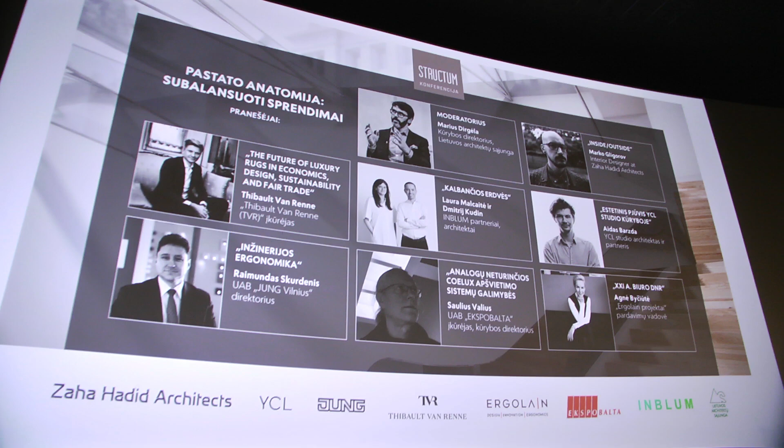Thank you for having me. My name is Marko and I come from London. I work with Zaha Hadid Architects and I was hoping of presenting a little opus of our work today, and I hope you enjoy it. To start off, I was thinking about how to do it and what would be this amazing thing that I would say and then everybody would be amazed. And unfortunately I couldn't come up with anything, but luckily for me, there are much smarter and much better people to say something, so let's use that.

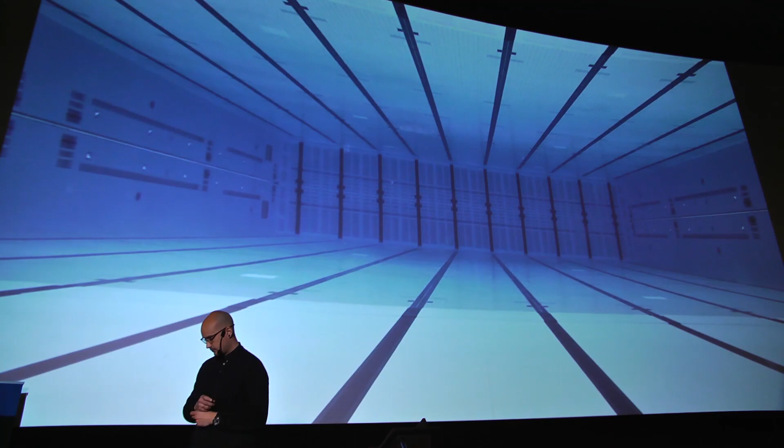We started off as Zaha Hadid Architects 30 years ago, more than 30 years ago. And it was built from that point. We started off with 5 people, maybe went up to 25, till more recently we have 400 people. Well, I mean, obviously I'm the instigator, original instigator of many of the ideas, but with a focus, of course, and it's always on innovation, and it has always been about innovation, about technology, and about materials, but mostly about ideas. And we focused a lot in the last 30 years to develop an idea. I think that all the odds were against me, in the sense that it was very difficult for women to make it in architecture. It was very difficult for that kind of work to make it in architecture. So it's not just being a woman or a foreigner, it was also the work itself was quite, people could not imagine it would ever be happening. So I think that to achieve maybe a fragment of what we would try to achieve was quite a feat, it was quite something. So I'm very proud that we managed to do that.

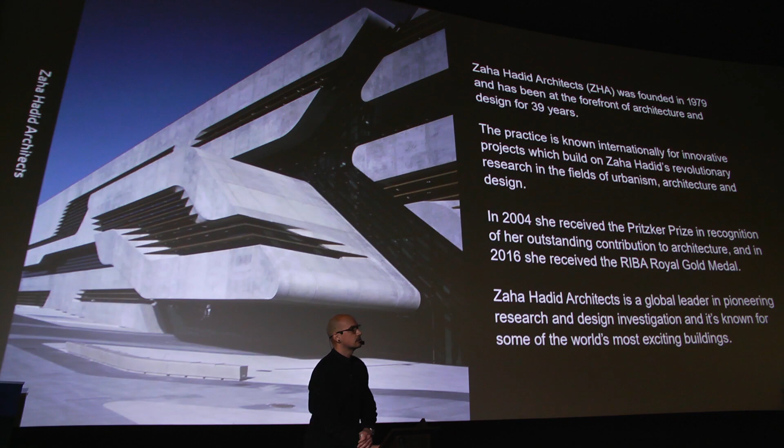Thank you for that. Just like Dame Zaha said, the studio was founded in 1979, so that's almost 40 years ago, this year. And what was briefly shown in the video and what is important to mention is that in 2004, she won the Pritzker Prize Award for her contribution in the architecture, and also the Golden Medal from the RIBA in 2016, being one of the rare women to achieve such an award, I think that is worth mentioning.

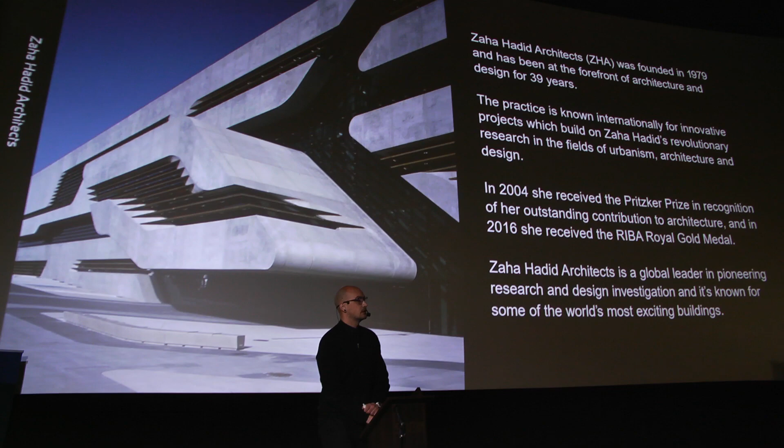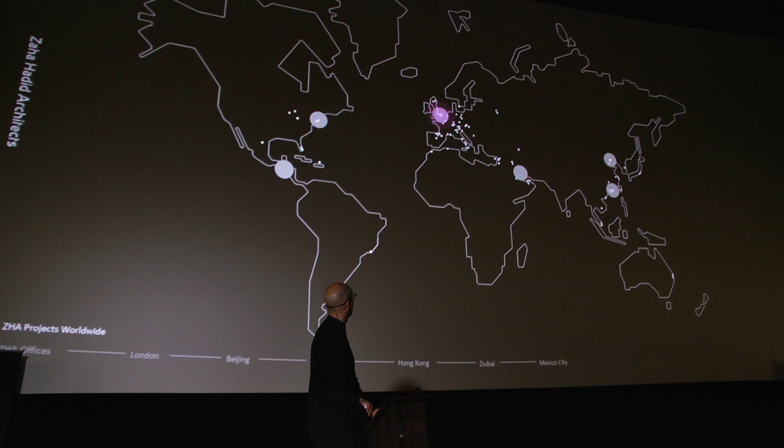Now, our office still continues to exist and thrives, and even though we started as a small office in Clerkenwell, London, we kind of expanded, and over the 40 years, you can see now that we have offices across the globe, with the latest one being in Mexico City as well, with projects spanning the world itself.

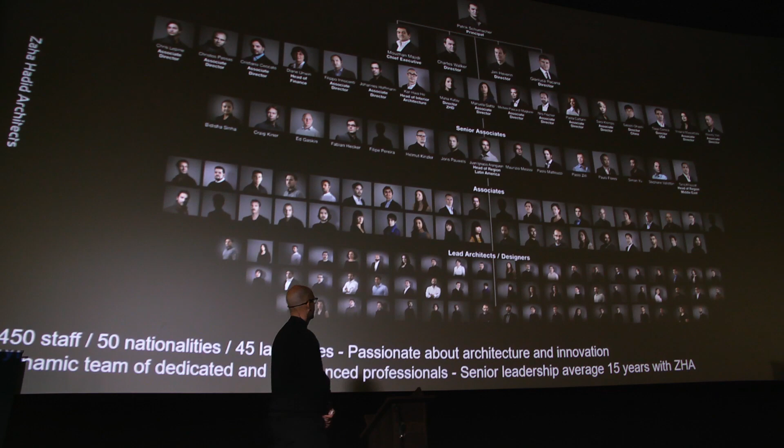But of course now, there's a lot more to it than just that. You can see our kind of structure of our office with our principal Patrick kind of leading the way forward. But of course, a great list of people who used to work with Zaha from the beginning and who learned from her are still continuing to develop that. She mentioned we started from like 5 and then went into the 25, but now we're 440, 450 staff with 50 nationalities, 45 languages spoken between us, and that passion for innovation and research is still there, and it's still going.

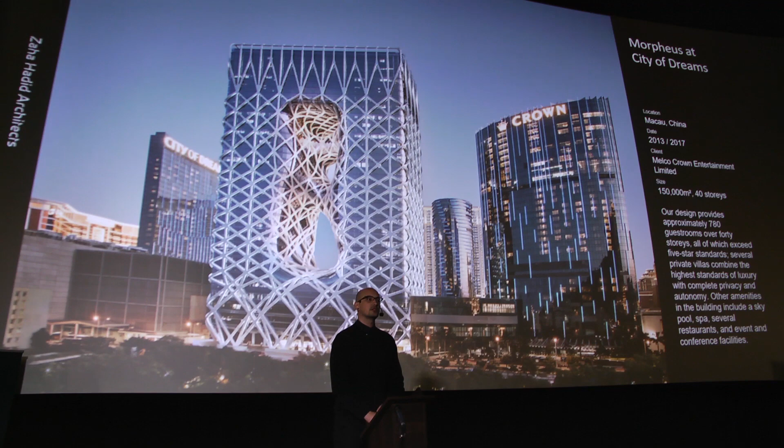In order to showcase and make this presentation a little bit more interesting, instead of just showing the end images of products and what they are, I thought it might be interesting to showcase the process through which we go for each project, and to take a small sample of our work, 2 projects that I worked on, and show you how we go from the concept stage and how we go into the further development of that, through mock-ups and getting to the installed version of it.

The first project is the Morpheus Hotel in Macau, China. The City of Dreams is a huge complex of casinos and very high-end hotels, and we were hoping to contribute to that. It is a 40-story building with a footprint of approximately 100 by 50, with 39 floors, including one level of the basement. I wanted to showcase from the start how the process of creating such an entity begins, and this is the beginning. So we took the parameters of the footprint of the building, the maximum allowed, and then extended it as much as we could, creating this kind of boxy element.

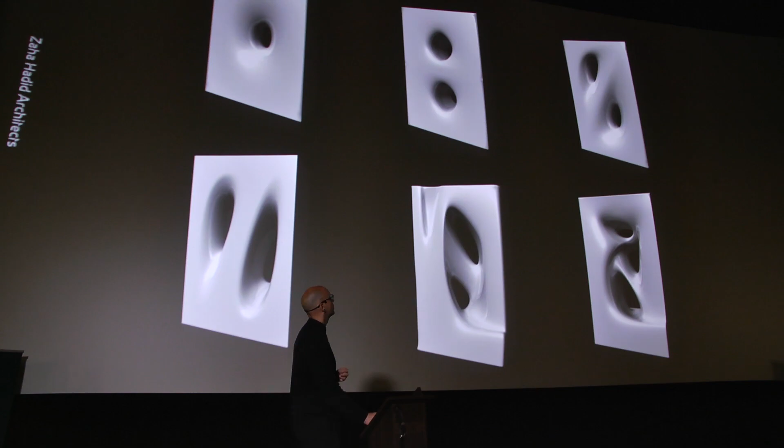Taking that and applying very strong edges to it, we tried to see what would happen and how it would look sculpturally if we started to protrude it, applying one hole and then the other, and how they would look. You can see the evolution going from left to right.

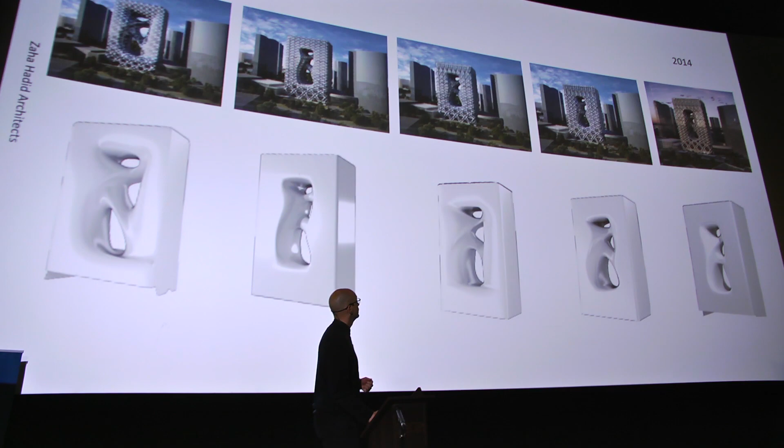What does it mean time-wise? You can see how from 2012 it evolved all the way to 2014, which is what we have now. Over the years we went through the process of finding that perfect form, through research and work trying to find the key element. This is the final product, but just showing that wouldn't be very interesting, so I'll explain further into detail.

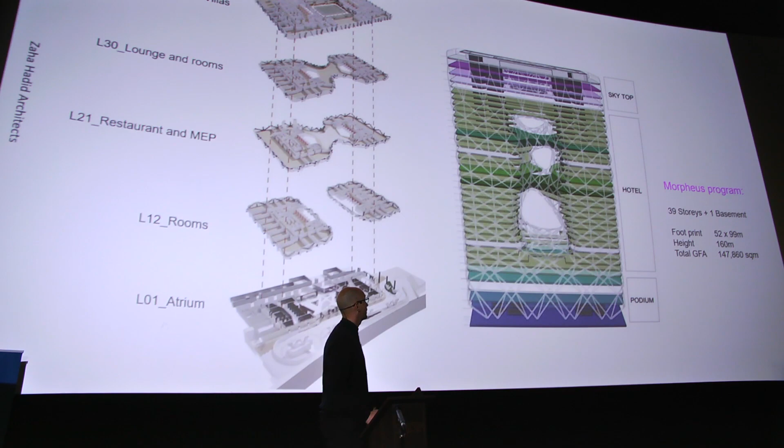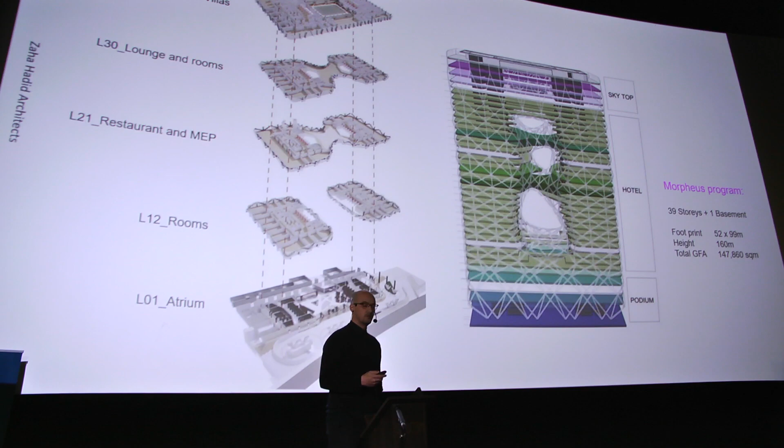In regards to the program, it's a 39-story building with a podium consisting of several levels of, of course, casino, which integrates into the whole City of Dreams aspect. Macau, being one of the meccas for that kind of activity, has approximately 780 rooms, alongside the skytop that has the larger accommodations such as villas, and also the open swimming pool.

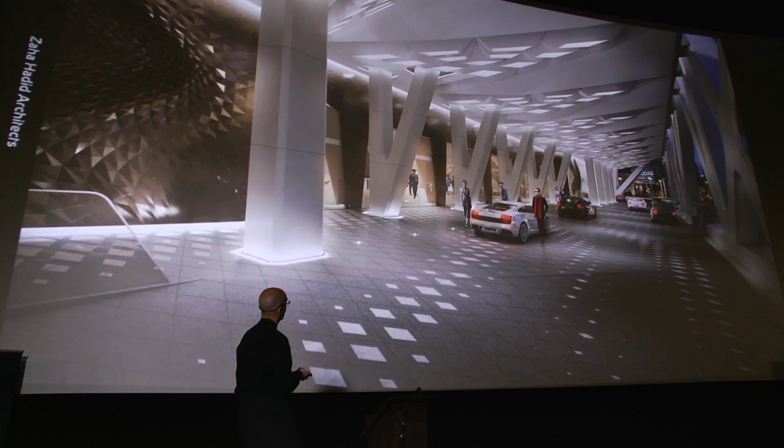But before showing that, I want to guide you through the hotel as a guest. I think it's a rare opportunity for somebody to give you the hotel experience without actually going there. You arrive at the hotel via the porte cochere, hidden behind the exoskeleton, where you're greeted by the staff and taken into the lobby.

This is the lobby of the hotel, where you have entrances on top and bottom, and on the lateral side you have vertical communication in the sense of panoramic lifts. On top we have the huge ceiling where the contents on the left and right are focused inwards.

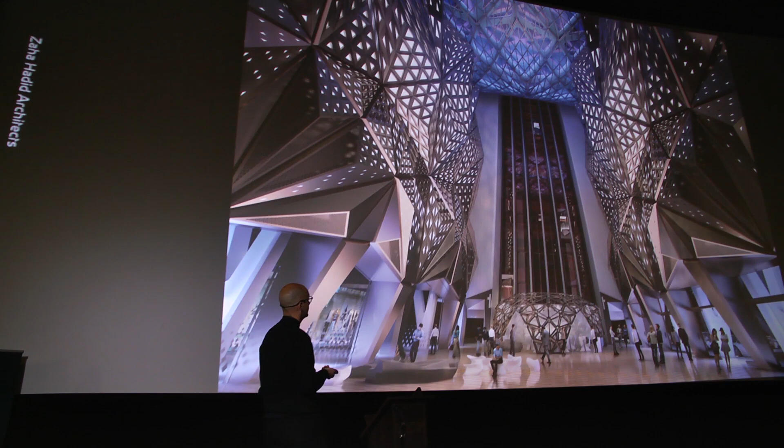As a hotel, you must have a reception area - nothing new about it, but that's on the left and right-hand side. We have a kind of day cafe, something becoming very popular in Asia as well - a day restaurant that has only sweets or dessert throughout all the courses of the day. This is our try, and behind you see the panoramic lifts working together, which were completely custom designed for the project.

Now, how we went through the process of designing it. When you approach the problem of designing a space with such a high ceiling, you start to lose the tangibility of human scale. If you populate it with chairs, you will never achieve that sense of accessibility to human scale. So what we did is figure out a way to assemble a structure taking in existing motifs of the building and applying them to create this structure, which gives us an area for that cafe to exist.

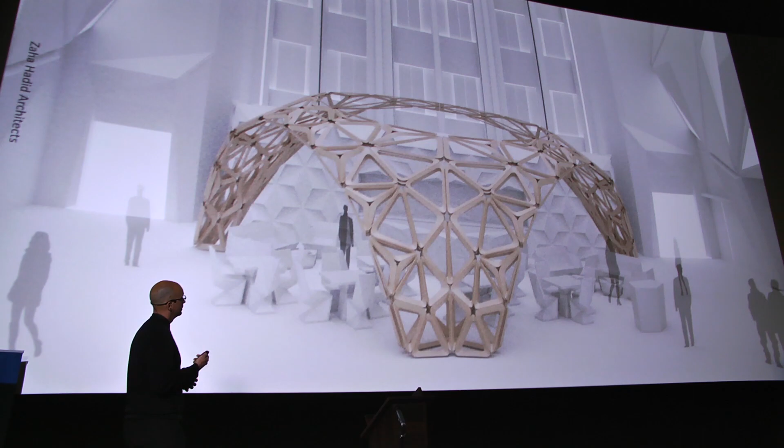A very simple, not that simple, but appearing very simple structure, being also very transparent and light as well.

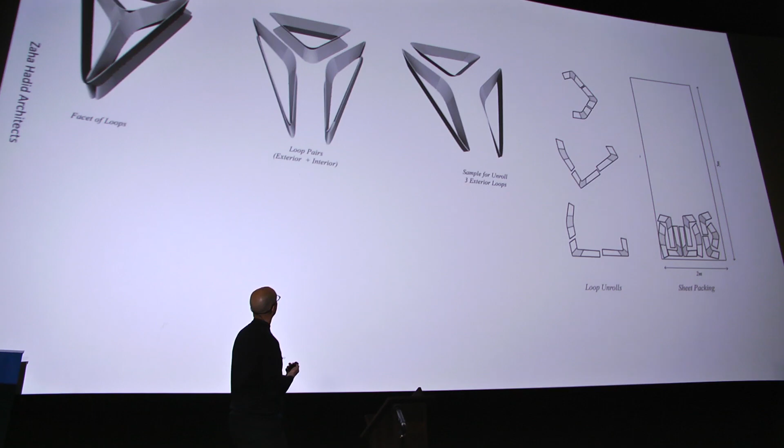The way that was designed is it consists of a double layer of flat aluminum pieces, which can be CNC cut from a flat aluminum sheet and then assembled in a sheet packaging and brought to the site and assembled as well. They consist of two layers: the outer layer and the inner layer of the structure itself.

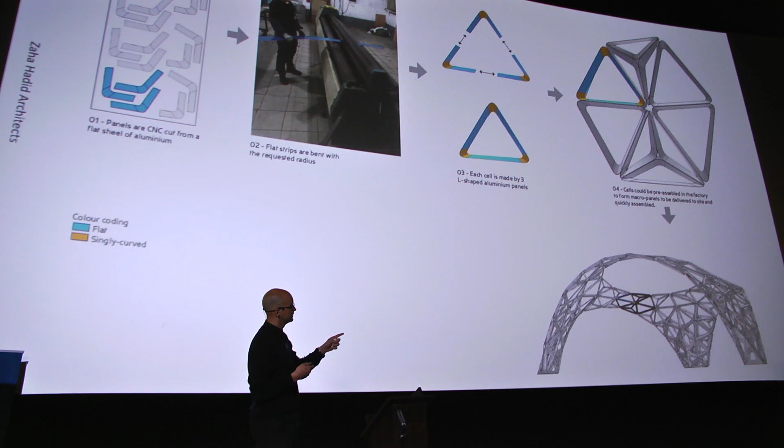In terms of manufacturing, the panels are cut in CNC, and then the flat strips are bent in the corners to achieve the desired radius depending on the location. So then you get the 3 L profiles that you assemble, getting that cell you can see in the third image. That cell, assembled with the other ones, becomes that kind of macro panel, and part of that macro panel becomes this part of the structure.

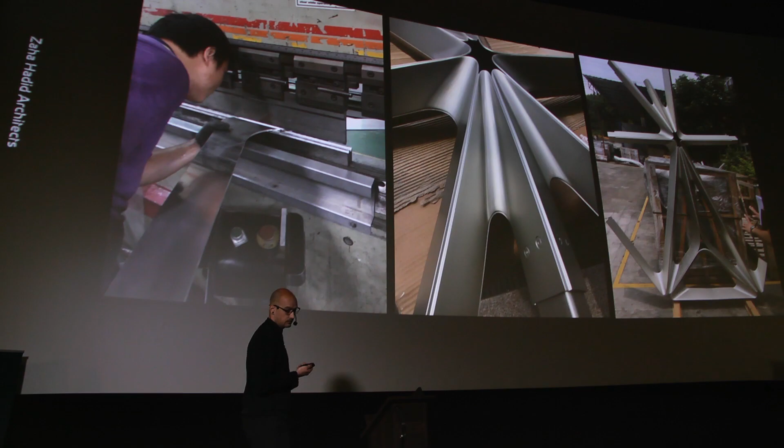And then how it looks during the first testing that we did. You can see the manufacturing or the bending happening on the left, and then the finish assembled in the middle image. You can see the amount of precision that the manufacturing was done, which is just incredible. And then how it looks assembled on the right, in one of the visits done to the Chinese manufacturers.

Other than that, I wanted to show you a very short video of an already done space, and this is the ride in the elevator, in the panoramic elevator. Just how the space looks and what it does. You can see the structure. It's not really covering anything, but it's usually just giving that notion of existence and belonging almost.

And then as you continue up with the elevator, you're going past the first belly, as we call it, and the interior part of it, and then getting to the top levels where I'll show you the restaurant on the 21st level as well, and then getting to the top level where the villas or the larger accommodations and the swimming pool are.

This is a kind of unique view, I think, for the hotel, considering that it has that notion of going inside, but also outside, so you don't really know where you are. I think that's a great, very unique experience that you get.

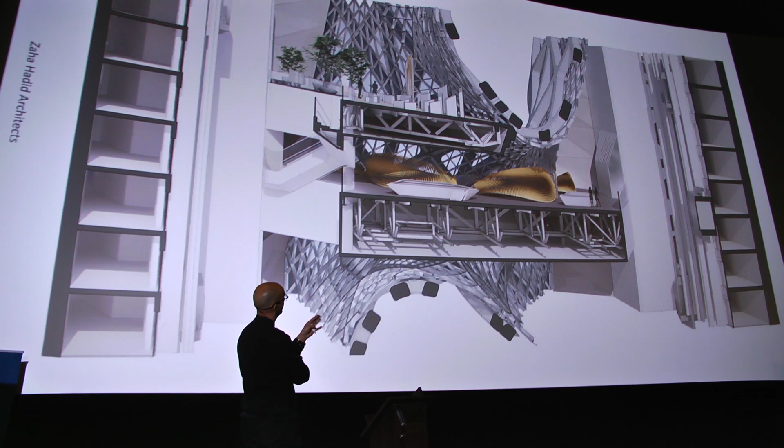I mentioned the hotel and the other levels as well. This is the restaurant at the 21st level, and here in this diagrammatic sketch, you can see how it exists between the structure, the exoskeleton, and the content of the restaurant as well.

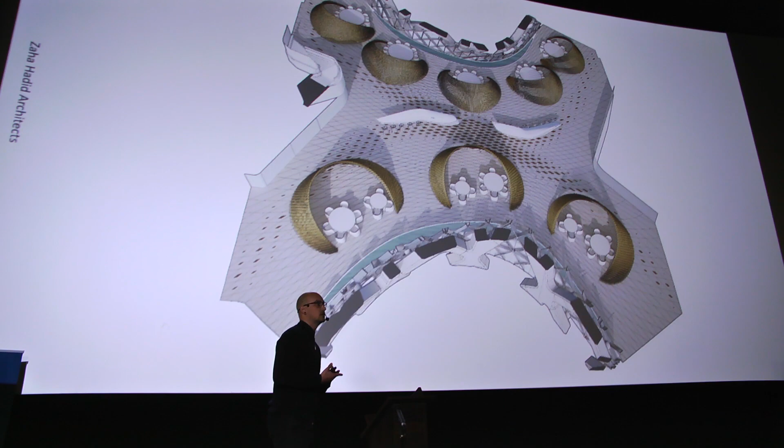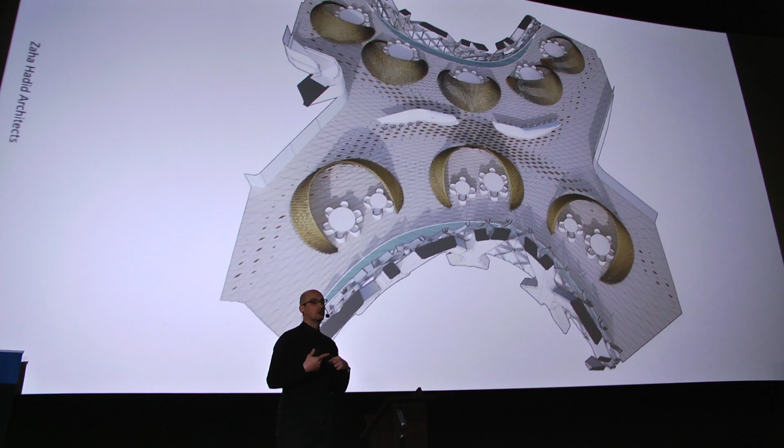So the way we thought about it is that we had this open space on the 21st level where we needed a restaurant. So in order not to just populate it with tables, we inputted a couple of parameters. We juxtaposed the privacy that the restaurant requires, or the diners require from being in a higher end restaurant, but also the higher traffic or expected traffic of the rest of the guests walking around trying to see it.

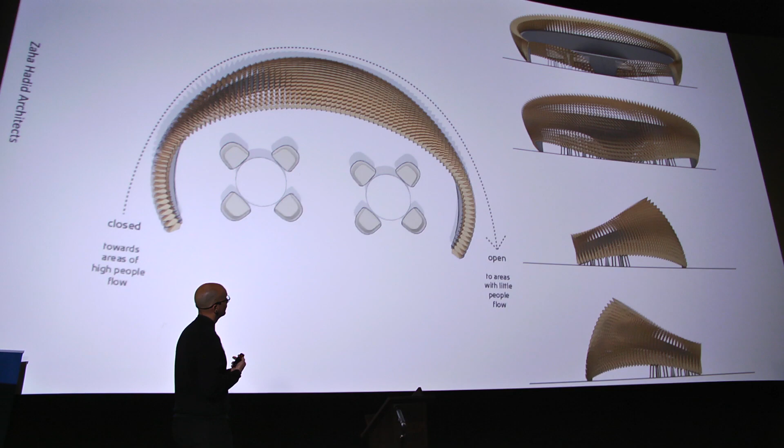So what we came up with was a parametric approach to the whole story, where the expected traffic of guests was higher, the individual elements would close, and the cocoon would stop visibility through it. Where we were expecting a smaller amount of passengers or guests, the cocoon would open up, and the guests, the diners, would actually see through it, having this lighter sense of the whole space. And then on the right you can see how it looks in the different elevations and side views as well.

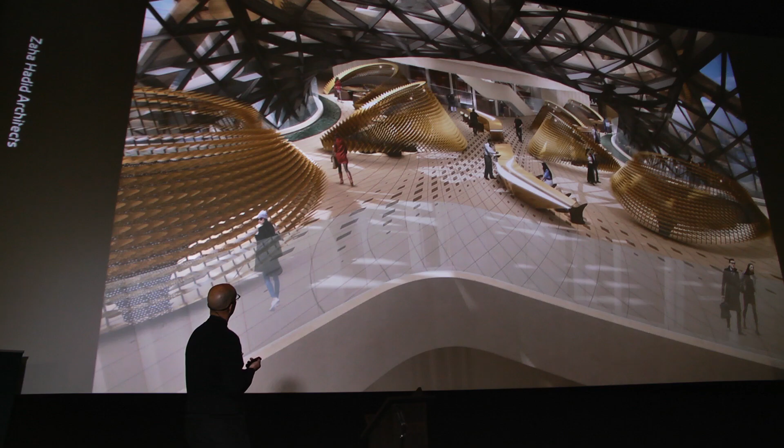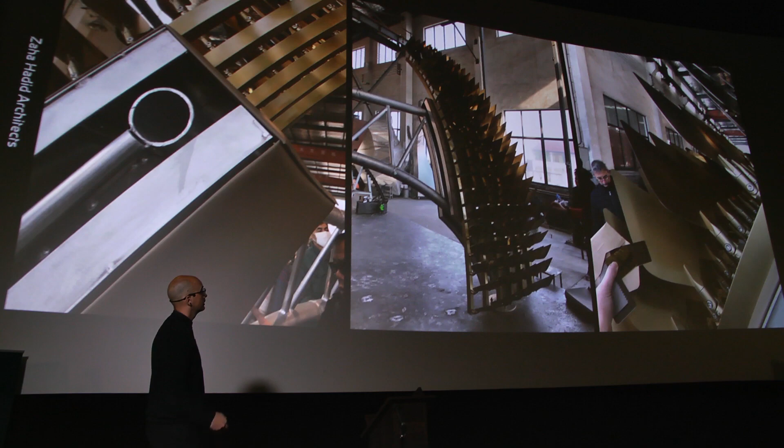And then, of course, testing whether the finish is correct, as desired. This is how it looks built, very similar to the render. We were quite happy with the effect of it.

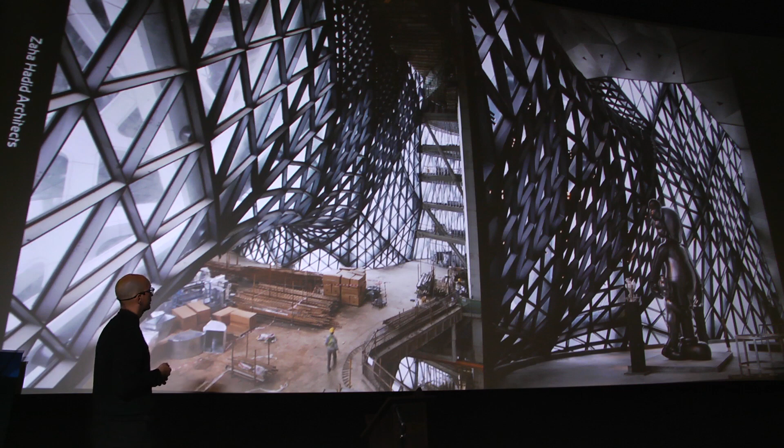To end the presentation of the project, I wanted to show images during the construction, and this particular one shows the before and after of the same space. This is during the construction phase, where we can see it's still not done, and then the actual finished space, being used as well.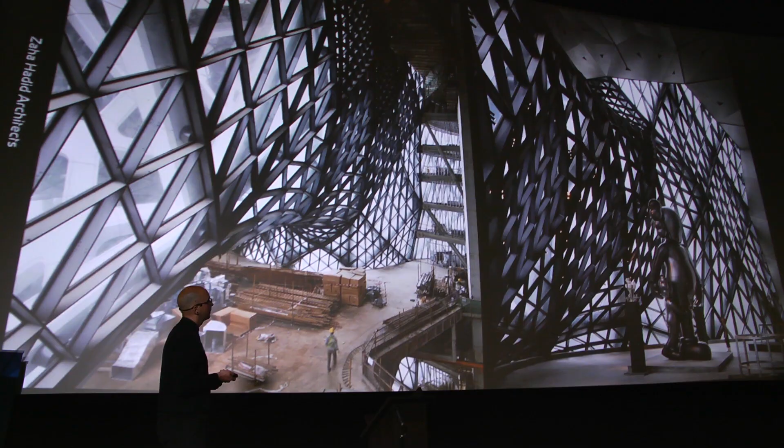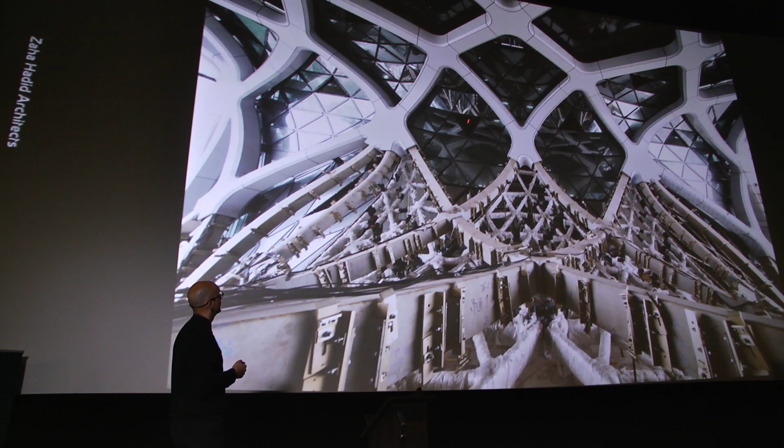The facade being developed — I think this is a beautiful image depicting the installed part of the facade being almost in half, with this one still in the process.

Now, don't get me wrong — there's a whole presentation of at least two hours just on the facade. What I was trying to do is cover the whole thing very briefly for the time that we have.

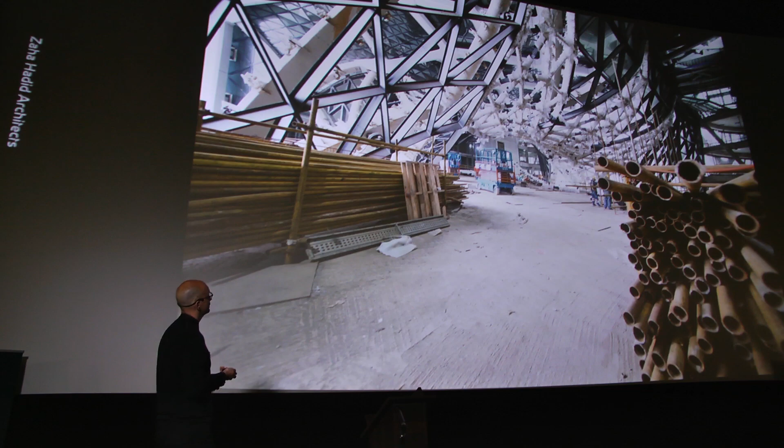You see the interiors as well, and while it was still being done, the structure on its own was already existing and just being incredible, and I hope you agree.

So that was Morpheus, and the second project is something that is still being built. Another project very dear to me is a bit different, and I think it's important to showcase rather than another hospitality project. What it shows is an infrastructure project — this is a metro station in Riyadh, Saudi Arabia.

Saudi Arabia has for almost a decade now been building one of the largest building sites in the world, creating a public transport system from basically zero, with six metro lines being built at the same time. We were lucky to have one of the key stations designed by us — we won that in 2012 in a competition, and were lucky to see it through, further develop and design it, and also participate in the construction phase of the project.

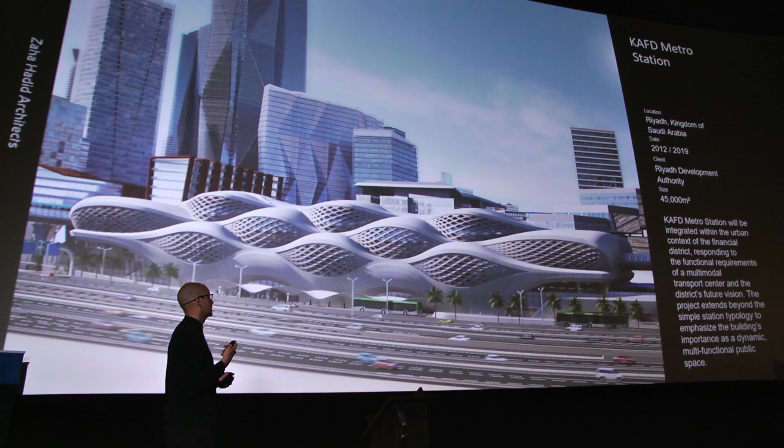The location of the station is in the King Abdullah Financial District in Riyadh, a new financial district whose master plan was designed by Henning Larsen Architects, along with many star architects like Norman Foster or OMA, etc., who have buildings inside. It's an incredible space that, once done, is going to be a masterpiece, and we were lucky to participate in that as well.

Now, regarding the inspiration for this particular project — usually a designer, not just us, seeks inspiration in multiple ways and places. Sometimes you have to go far and really struggle, and sometimes it's not that obvious. But in some ways, if you look at the surroundings and at what you're doing and where it is, you just might be lucky, and I think we were in this case.

Lucky in the sense that you need to recognize qualities that might not be obvious. One might consider a desert a harsh place, where even during the day you're too hot, or during the night you're too cold — not an environment for somebody to really thrive in. But recognizing beauty in such a harsh environment is key.

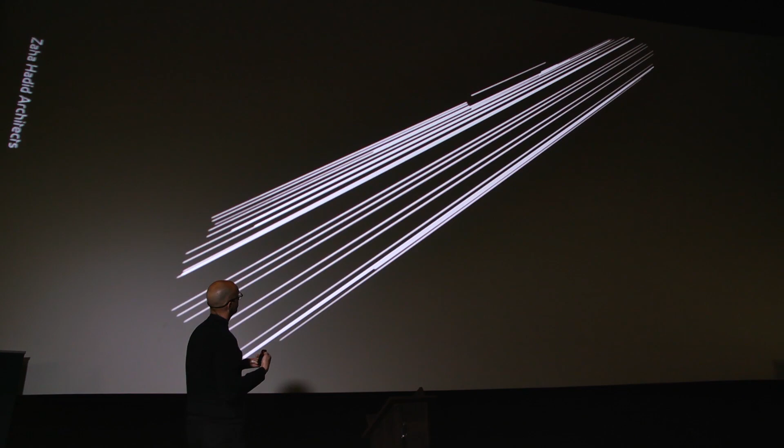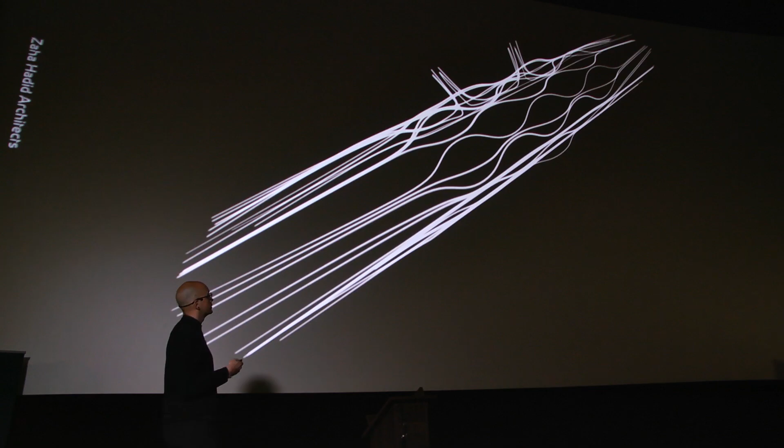But what would that mean in the sense of geometry? We can talk about form, but we have to create something more tangible. As I mentioned, there are 6 lines, and out of those, 3 metro lines are in our building. If you apply those train tracks as an abstract line, then add on top the building requirements and volumetrics, maximizing the size and the site you have, and apply additional parameters in the sense of visitors, human scale, and opening up towards daylight, what you get is a form that logically works in your favor.

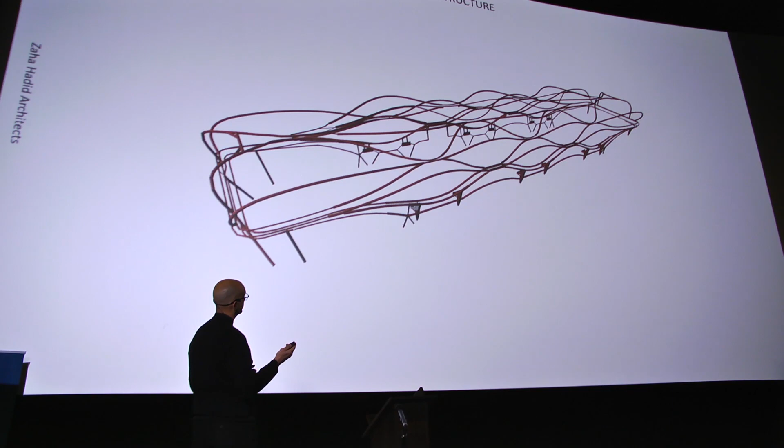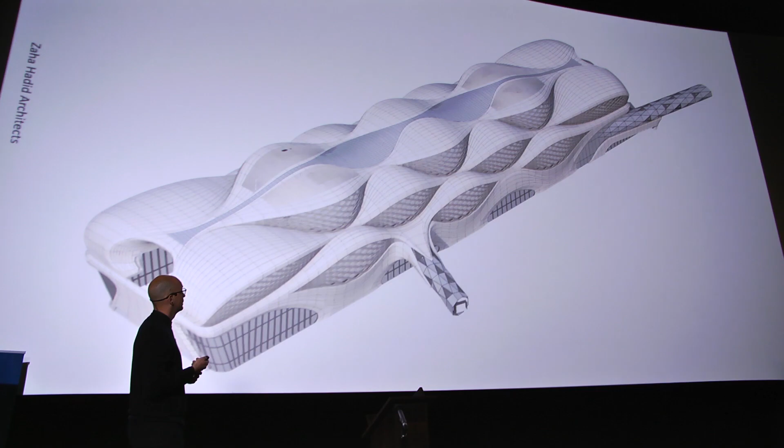Now what does it mean in the structural sense? I hope you can recognize the lines I was showcasing. Those lines turn into a structure - in red is the longitudinal structure, the main structure of the envelope of the facade. Once applied with additional cross structural elements of steel, and the diagonal grid of the 'eyes' as we call them, at the base, you get the full structure of the facade. Once you weather-seal it with the facade elements, you get this form, and once explained, it's rather obvious.

Now, what does it mean to work on a project such as this metro station? As I mentioned, it is still one of the largest construction sites in the world, and that means the amount of people involved is incredible. Trying to find a way to manage all that work in terms of time, but also in terms of collaboration, is a major challenge.

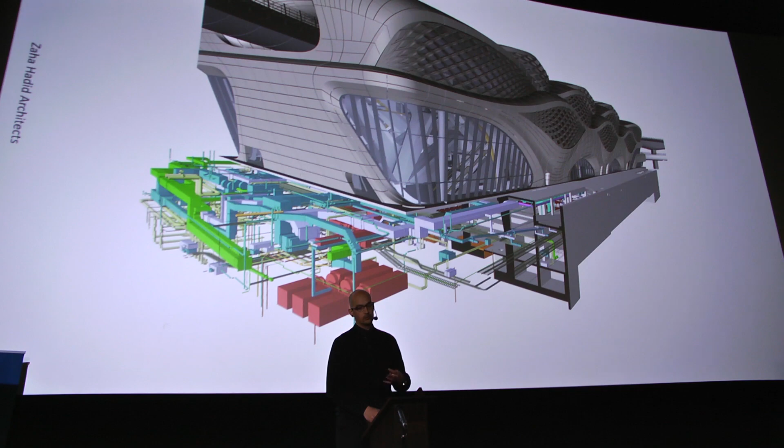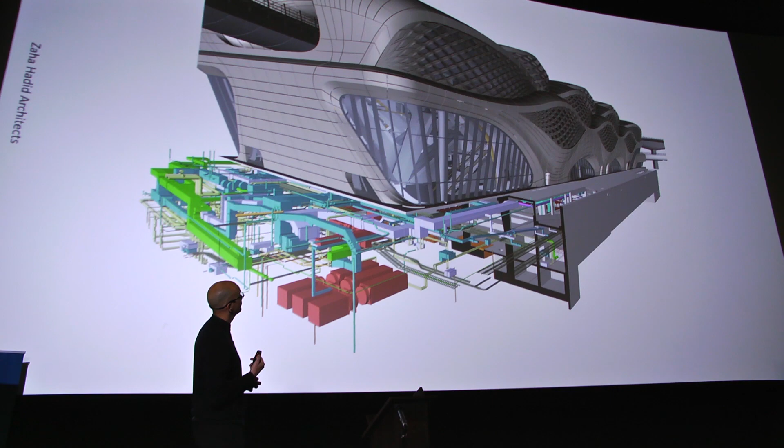We were contracted to work in BIM, or Building Information Modeling technology. In this particular case, it was Revit. You can see here this image taken from Revit, where the facade of the building works, and you can see the red structure I was showing before, but also all the mechanical and other equipment required, along with the cables and cable trays.

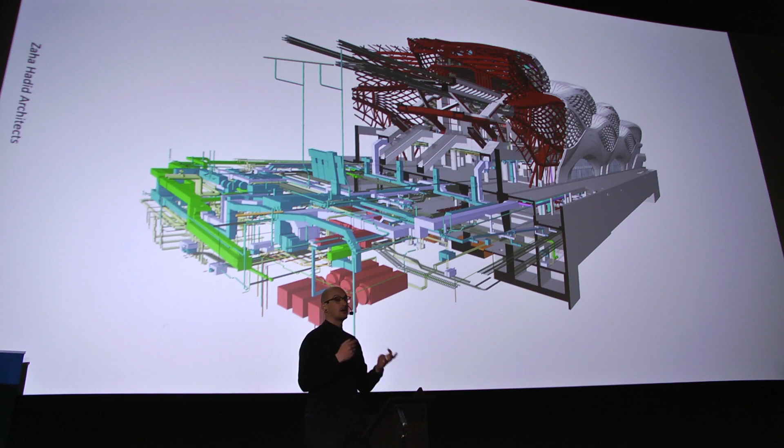The level of information that goes into such a project is incredible, and trying to manage all of that so it doesn't clash is difficult, because there are engineers working on our station based in Bangkok, we are based in London, and another set of engineers in Germany. Us all working together is impossible without software like that.

I want to showcase a couple more images from the Revit model itself, showing how well coordinated it was, and the incredible amount of work that went into it, not just by us but by all the consultants as well, and where we're hoping to build this. This is a longitudinal section, and here's the cross section.

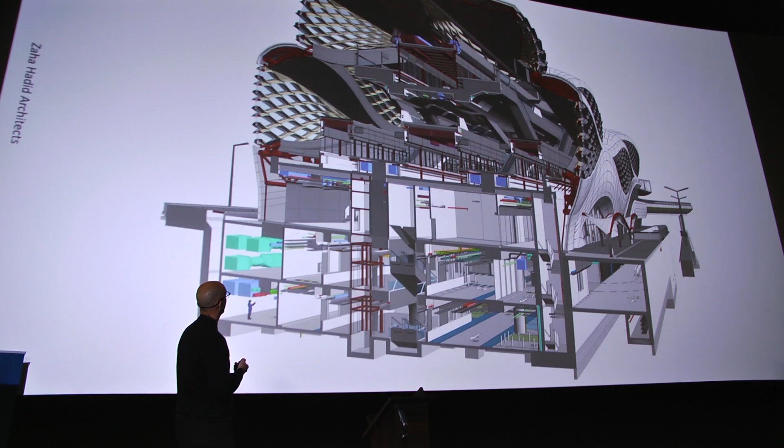Showcasing, as I said before, all the piping and ducts, and how that works together. With methods of clash detection and other technologies, which I'm sure you know of, we were managing to find a way to design and create a building that can be built easily and efficiently.

I told a story about the facade, and briefly mentioned the eyes as well, so I'm going to go a little bit into that before switching to the interior part. I'm doing well on time.

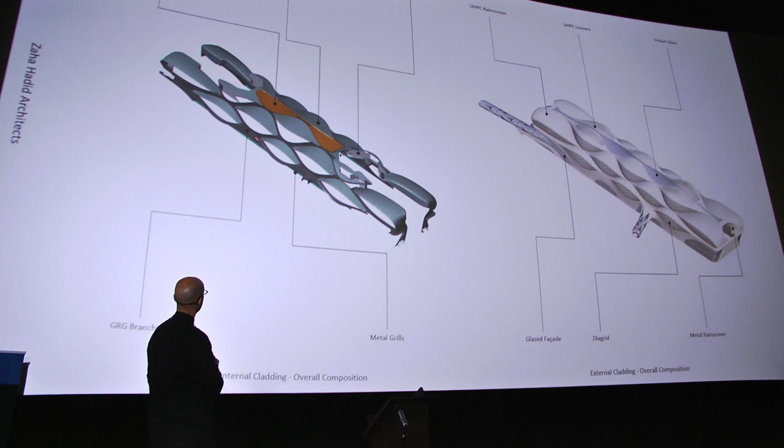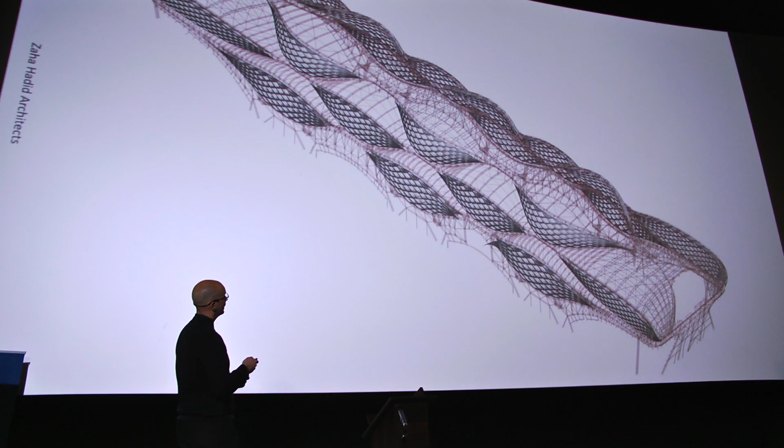I want to talk about how we tried to think about controlling such a harsh environment of sun and incredible heat, but also incredible cold, in the most natural way - or not the most natural way, but the most efficient way, you might say. This image shows all the structures I've shown before, with the diagrid, as we call it, or the diagonal grid of the windows.

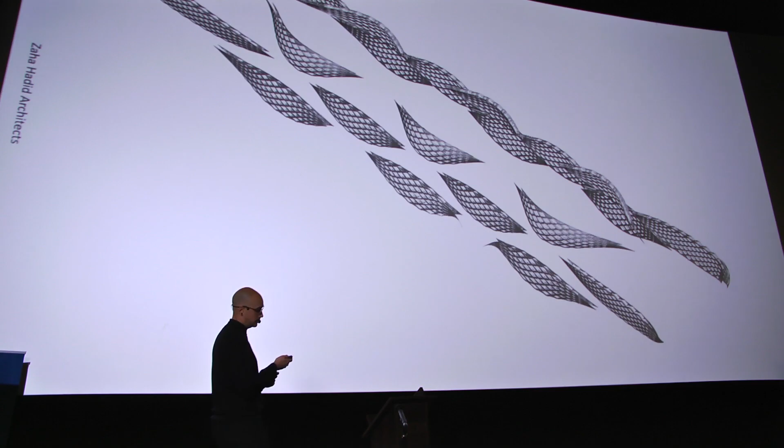So this is it. These are approximately 20 or 21 bays that we have, populated as you can see here with the exterior part of the diagrid and the interior part. What does that mean? I'll show you now. This was inspired by...

The result is basically that: we have the outer element created in ultra high performance concrete, where we have the glass piece, and then of course the composite panel in between them, and on the interior part we have the glass reinforced gypsum, which together work as a barrier between the sun on the outside and the calm interiors we're trying to achieve on the inside.

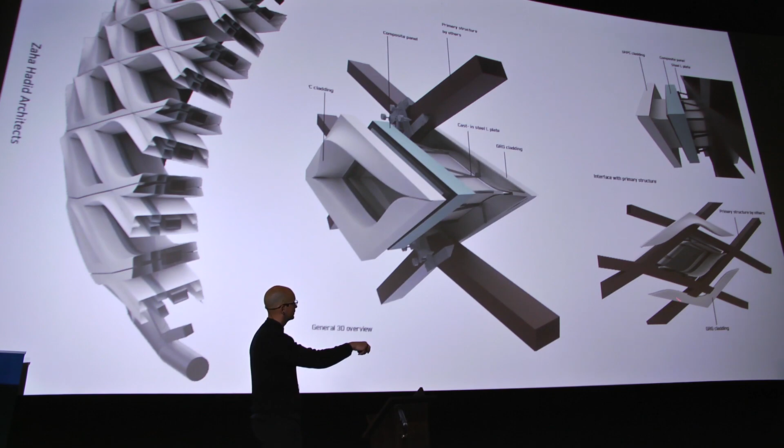Now, due to the complexity of the shape itself, the hand manufacturing, and especially the material chosen and the sheer size of each individual element, a machine approach to the manufacturing was required. This photo was taken during one of the visits to the manufacturer, where they were using an 8-axis hand to mill the actual mold used to create the individual diagrid elements.

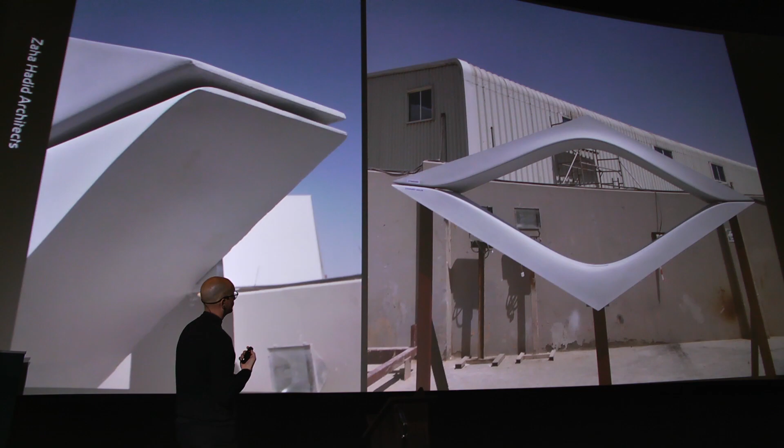You can see it here. This was one of the first tests done to check the possibilities of the size, but also the finish of it and the application of the sealer, or whether it's required or not, how it looks, but also the precision you get while using manufacturing at such a high level and standard.

And of course, later on, once we went through a couple of iterations, this was one of the official mock-ups done for the diagrid, but also for the full concrete elements of the facade as well. This is just a small portion - if you remember, the whole building consists of hundreds and hundreds of these.

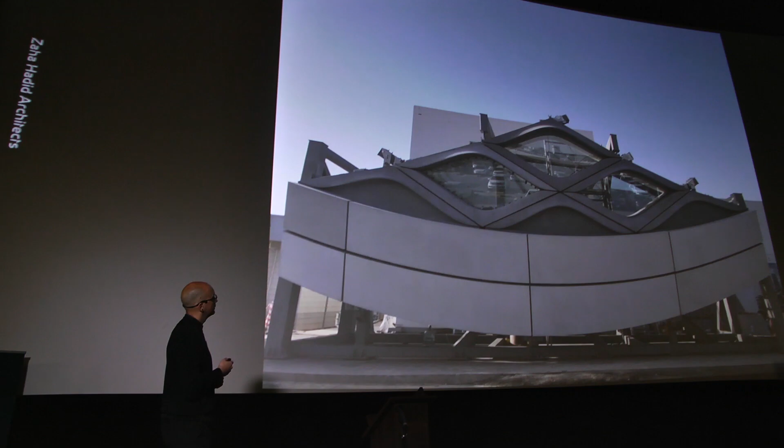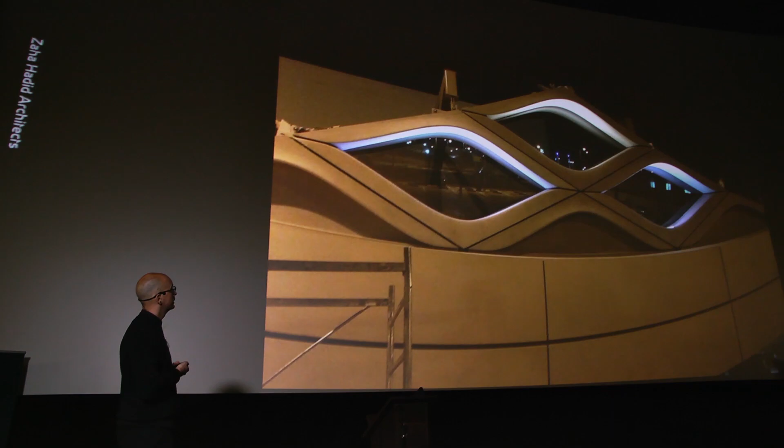You can see here how we tried to test the approximate coloring and color matching of the facade element, and the bottom ones being how they should look and whether they should be closed or not, etc. Of course, testing of the uplight and how individual elements should be lit, and what the color temperature of it is. How does the design, how does the detail work?

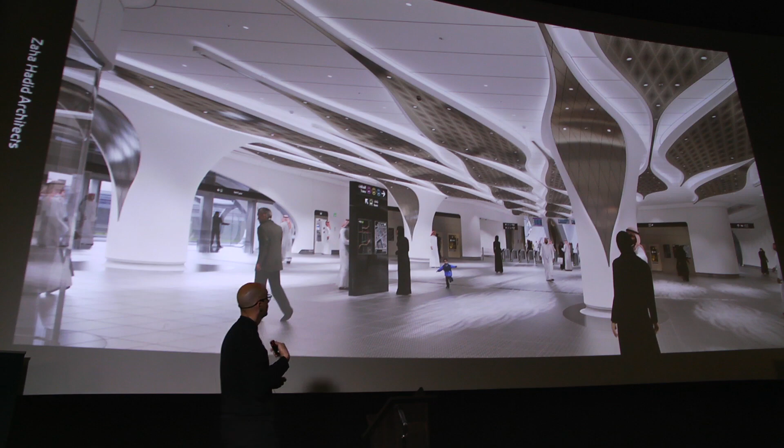Once you go inside, I thought about whether I should just go through the images of the renders and photos, but I thought it might be interesting to showcase: hey, this is the design, and then what might be done. So this is the main kind of entrance atrium where you're able to come in, actually buy a ticket, and then go through with your ticket onwards with your journey.

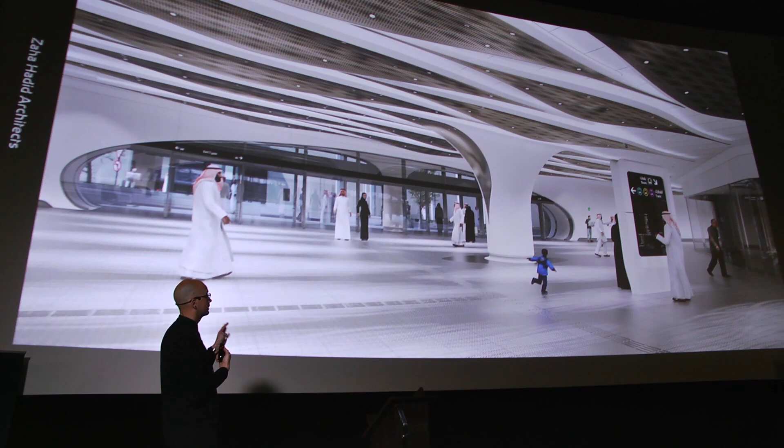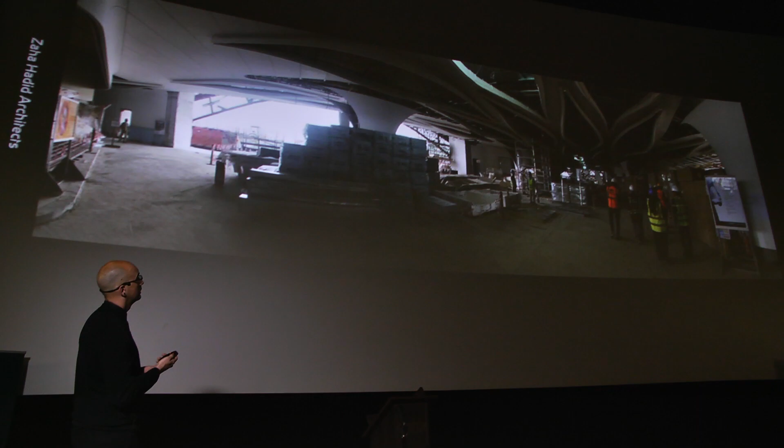Depending on what your destination is. And this is another image of that same space, looking more through the main atrium outside. And then this is the panorama that our site team did, showcasing how the GRG panels are getting installed and how that will look.

I'll move on further with the design elements. For anybody who has ever visited any Middle East public buildings, such as airports or other infrastructural places - and I think these are now getting installed not only in the Middle East or GCC area -

the prayer room is almost a must. What we did in the design was use the directionality towards Mecca, which is required by the design itself, getting this triangulated shape that we broke off to achieve a cocoon-like calm space that people can get away into and do what they came in to do.

As you purchase a ticket and go through the gates, this is one of the main communication points towards the trains and the upper level where the trains are. I wanted to showcase it as it's one of the rooms with the highest ceiling in the station, but also, in my very humble opinion, the prettiest of them all.

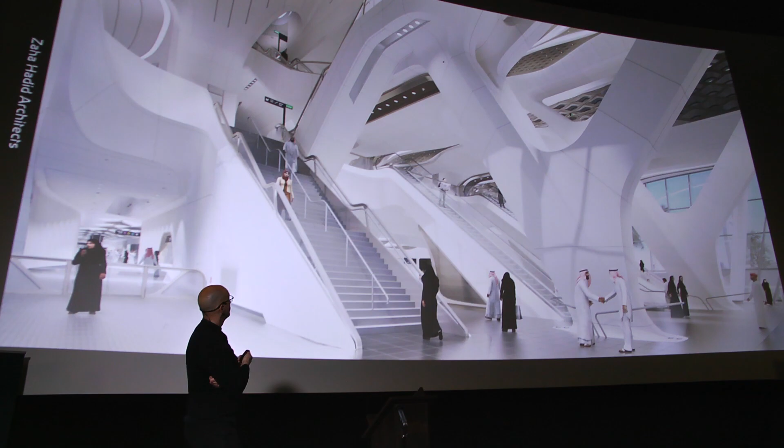It showcases the high quality of the engineering that went into taking care of the loads from the higher levels, and with the raking columns bringing them down, how we approached addressing such an imposing structure and dressing it into GFRG panels. This is one of the submission drawings we did for this particular location.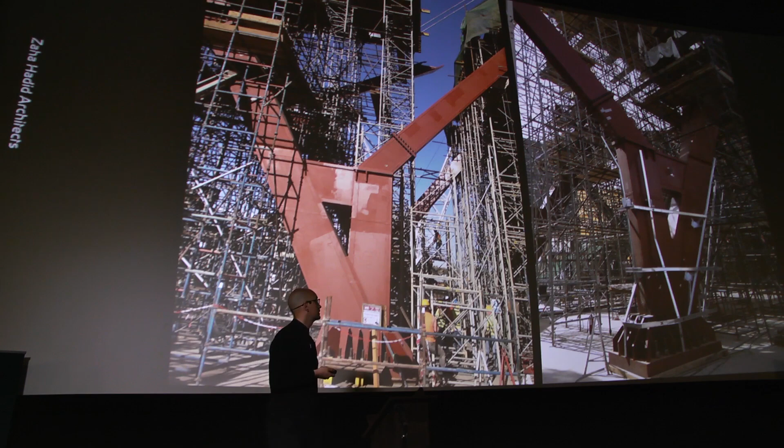Later on, this is a bit more assembled column, and on the right hand side, what is important is that this is further developed and assembled on site. You can see the secondary structure being assembled as well, where the GFRG panels will later come on. And this is it - the installed column with the GFRG panel.

Again, you can see how big and tall the space is, and how it's starting to take shape and resemble what I've shown you in the render as well.

I wanted to showcase the journey a bit further along. This is the so-called unpaid area, as we call it, the area on the higher levels where you're still not going through the gates into the trains. This is a high level that is very close to the facade as well.

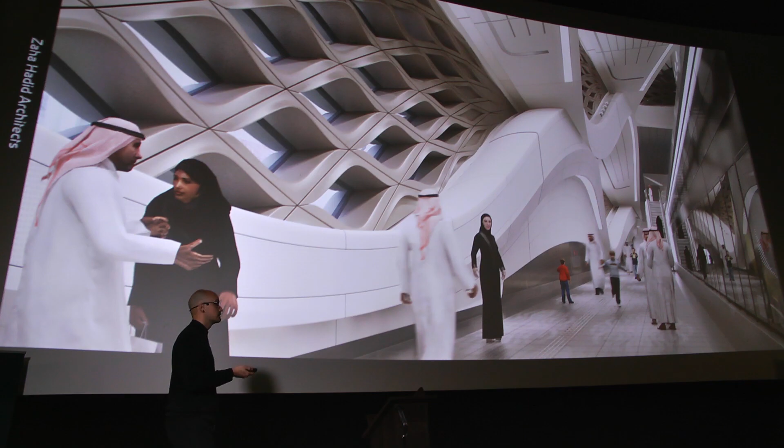And then this is the so-called pay area. This is the moment where you're actually waiting for your train - this is the platform for lines 4 and 6.

What we're very proud of is that the level of development of the project was very high, considering it was an infrastructure project, and the requirements for such a project are incredible - the amount of equipment, from CCTV cameras to lighting to everything else, is enormous, and coordinating all that was something we're very proud of. I can freely say there isn't a particular element we don't know where it was, what it is, how it went, and what the detail about it is.

You can see here the platform level, from left to right. In between, what we thought about is - because we don't have any walls or ceilings at all - how to integrate the AC as well. So what we did is try to use the floor. This metal element becomes, besides being the bench and the accessible part of it, also serving as a plenum.

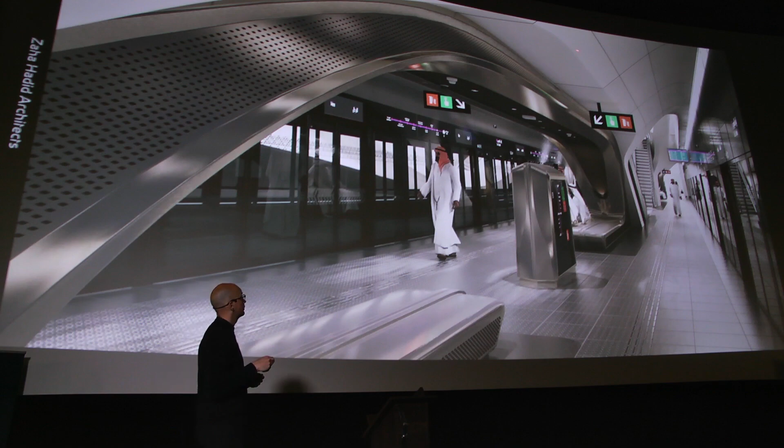So the cool air would come in from the bottom and exit through the perforated elements on the side, while also maintaining all the lights and equipment that I mentioned before. So it's almost total integration of elements, even though you might think you don't have anywhere to put them.

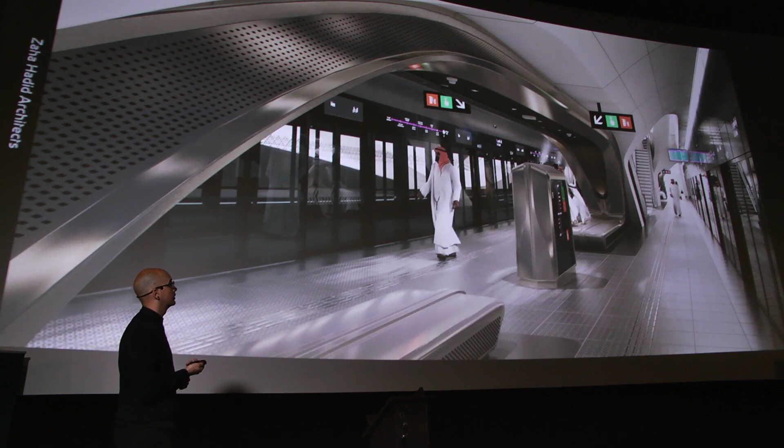This is the concourse level, so we're going a level above. As I said, the lines of Metro 4 and 6 are below—those are trains, one taking you to the airport, the other doing something else. But the main communication, if you want to go back to the city, is using Line 1, I believe.

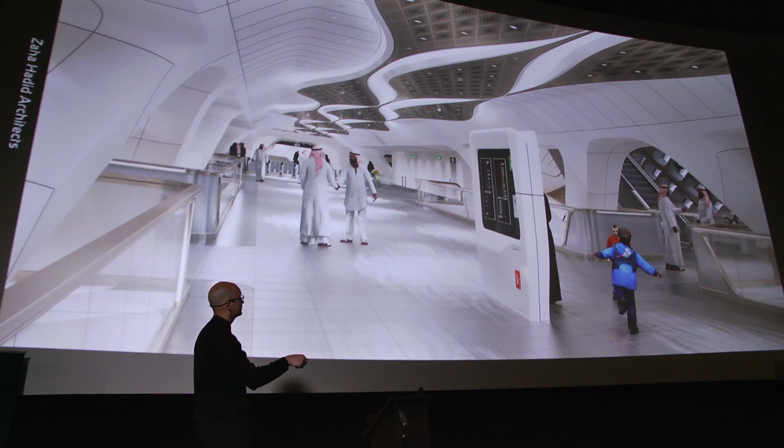The main communication is done through the concourse level—what we call the level of communication, or corridor, built above. Because of the narrow site we had, instead of putting it between the tracks, we had to raise it above. That is this concourse level, where you access the higher and lower levels through bridges on the lateral side along the whole concourse.

This is another image I wanted to show, as the feature ceiling is quite important to us, and I wanted to showcase how it was done and built. This was a fully accessible ceiling, which means you can demount it and access whatever you need behind it.

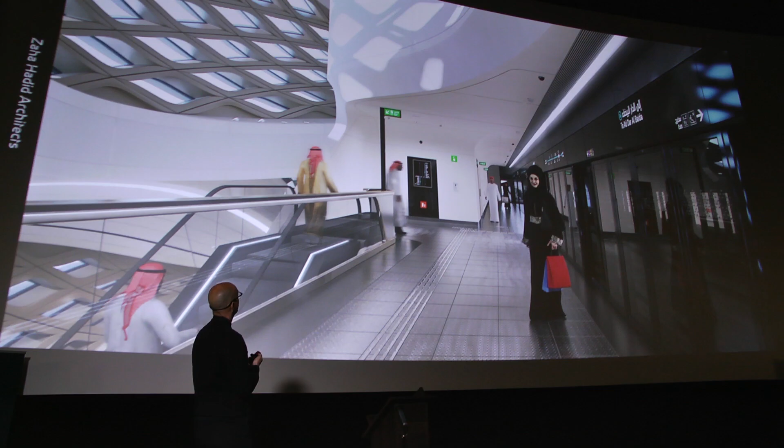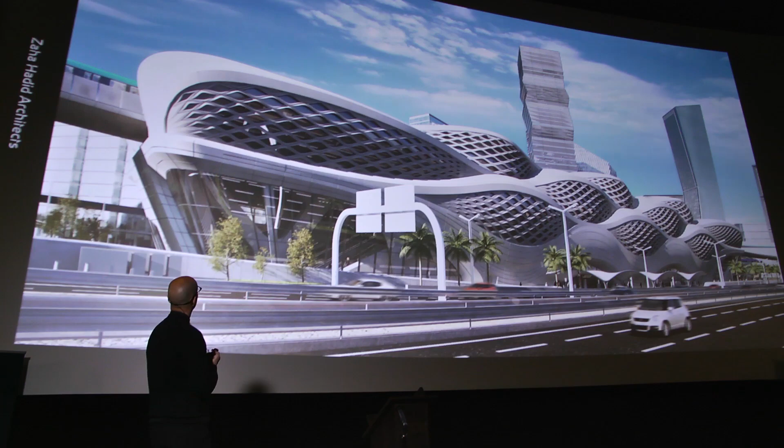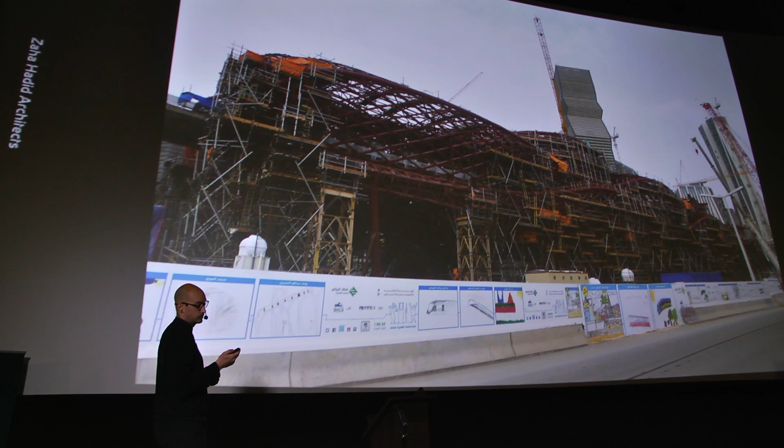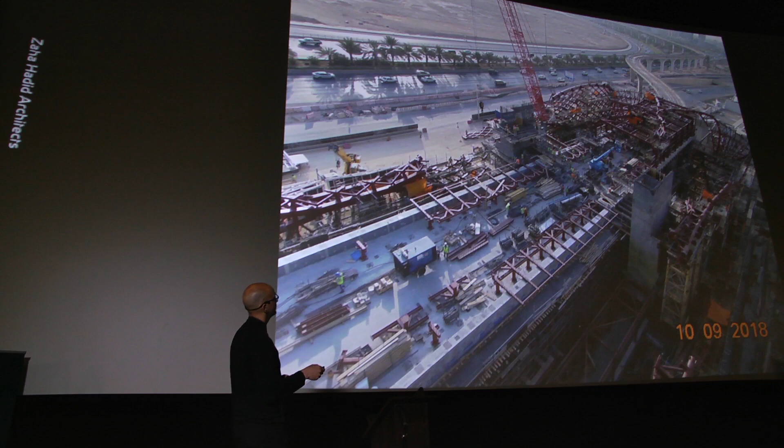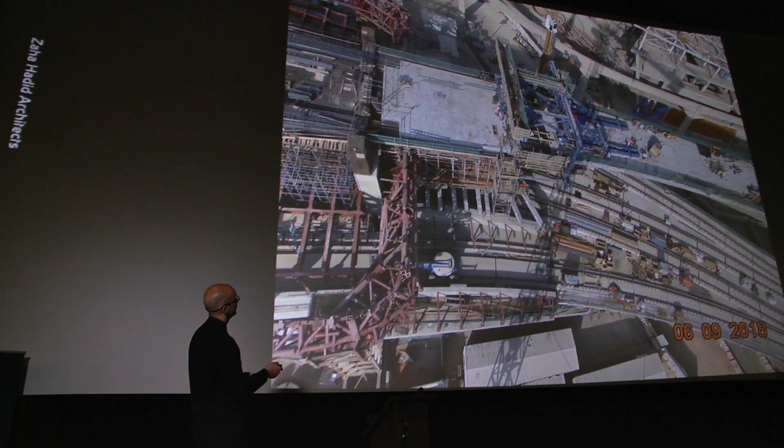The tracks I mentioned for lines 4 and 6, and the top level guiding the Line 1 trains into the building, and how it looks in a more recent photo. You can see here where we're standing—the photographer is on the Line 1 platform while the Line 4 and 6 tracks run inside the building next to it.

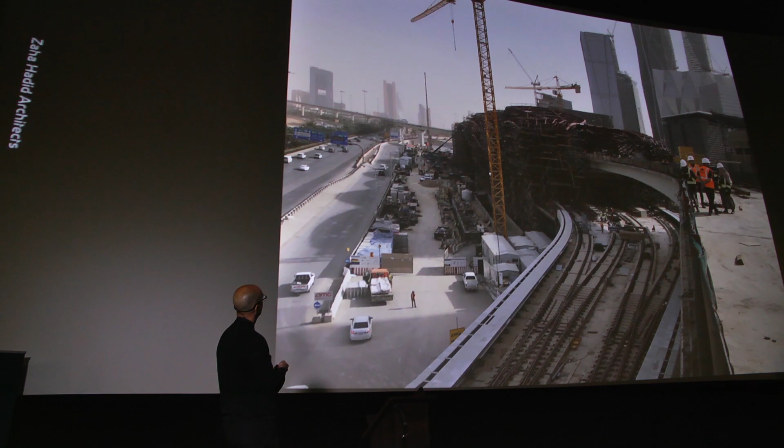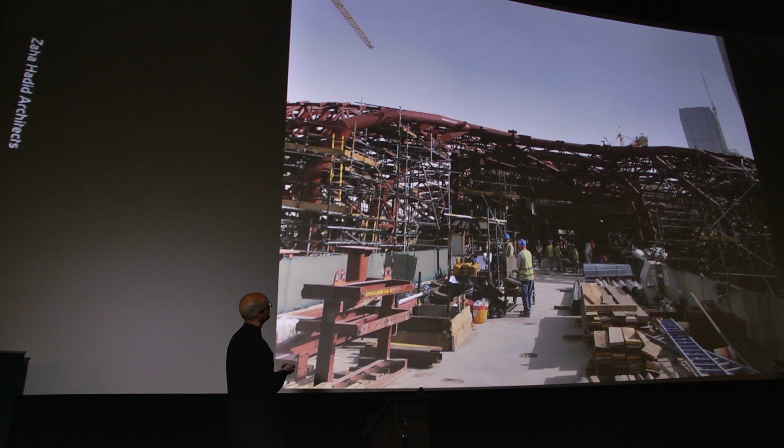This was taken at the end of October, and this is what the train sees as it leads its way into the building.

To wrap up—when I started thinking about what message the presentation should convey, and why it's called Inside and the Outside, I was very lucky to be able to work in one of the best practices in the world, and to come in and showcase my very humble contribution to it.

Being able to work alongside the incredible amounts of people capable of creating almost any design possible is very humbling. What I'm basically trying to say is that if we, as designers, start working on ourselves, the design will follow. What I mean is, if we work on our inside, the outside will come as well. Thank you very much.

Thank you very much. Do we have questions? Of course we have, but we are also too humble to ask. I'm sure.

Let me answer as always. My question would be - I'd like to ask you to tell the audience a little bit about yourself, because I think everyone is interested in your path that led you to work for this office. How did you come up to this?